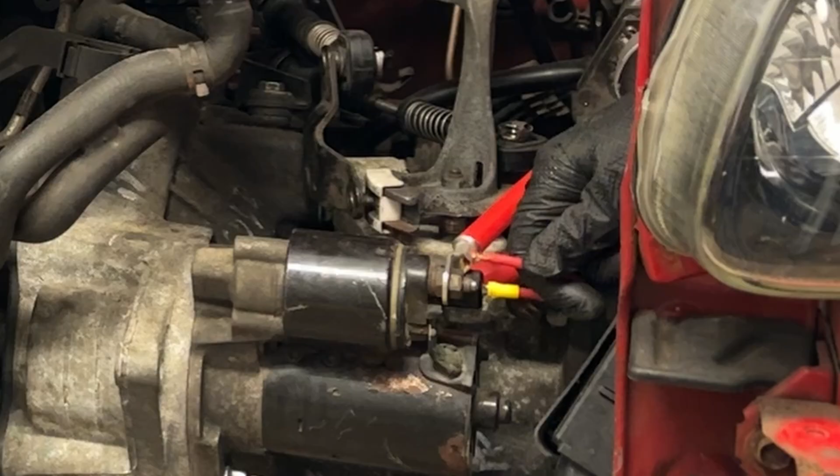Nothing happened. In the last part, I stripped out the rest of the interior and emptied out a load of stale fuel from the fuel tank. Then I left it there because the video got too long.

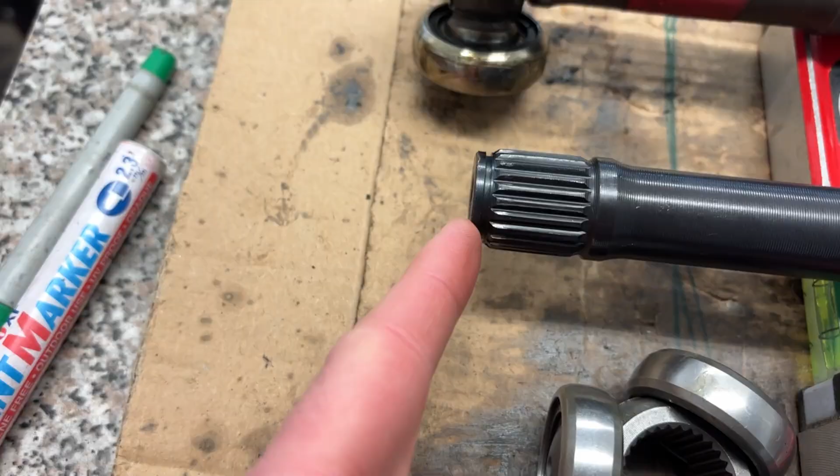I was going to cover the process of stripping down my shiny new drive shafts and prepping them to be welded up, but then I discovered my shaft wasn't long enough, so that put a lid on that for now. I can't use my original shaft because I'd already cut and welded it for fitment testing, so whilst I wait for another one to show up, I suppose it's time to open this can of worms.

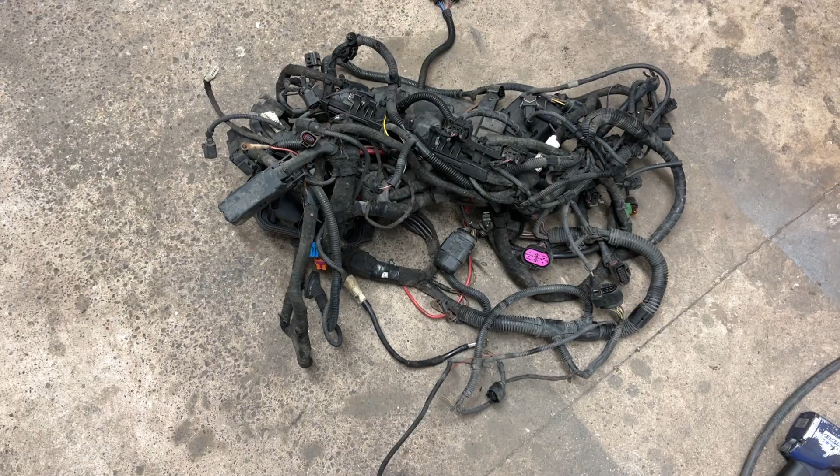Vehicle wiring is one of those parts in every build I follow where I just glaze over. Don't get me wrong, when done right it can be one of the more impressive and visually appealing parts of a build. It's just so intimidating to me, and there's a high and often expensive consequence for getting it wrong. But there's no use in me kicking the can down the road, so let's put the meter in continuity mode and get this over with.

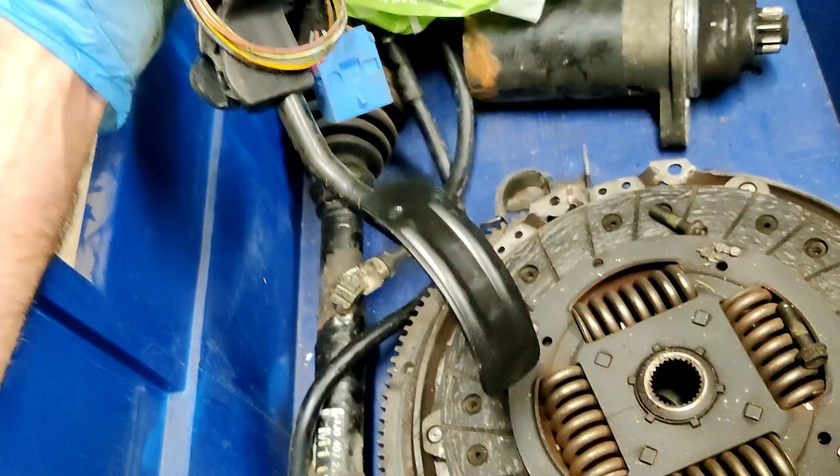One of the problems I've made for myself with the wiring, and with this project in general actually, is I bought everything on a pallet instead of buying a donor car and pulling everything I need from that. Because of this, every time I need a part I have to go to the breakers to find it. That means risking my life in health hazards like this. At least they left sanitizer this time.

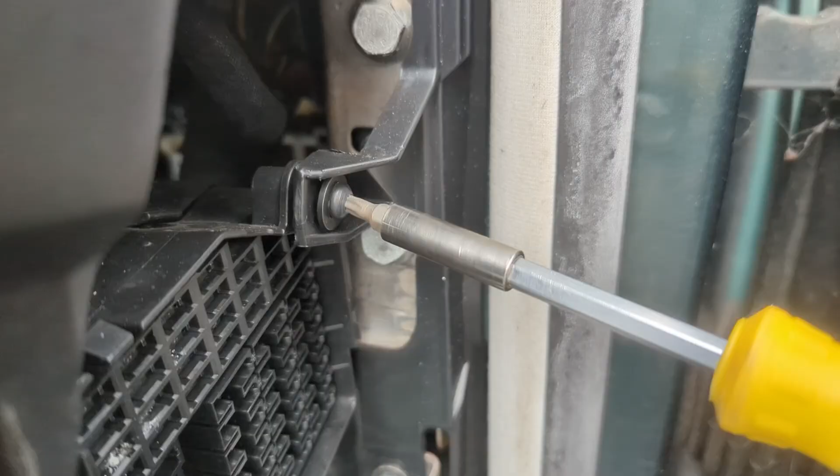After hacking out a completely empty fuse panel from this Mark IV Golf, I found another panel which still had all its fuses inside a Bora a bit further up the yard, which is just typical. I also took the clutch pedal switch because I'll need that too.

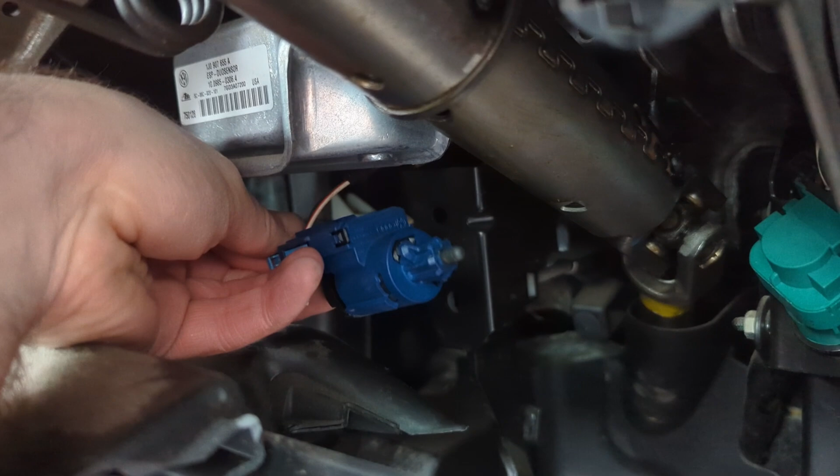My goal in this video is to at least get the engine cranking, but before I can do that, a few things need to be taken care of first. What's left of the broken dipstick pipe is replaced with this nice new one, which cost nearly 3 times more to ship than the part itself, thanks Autodoc.

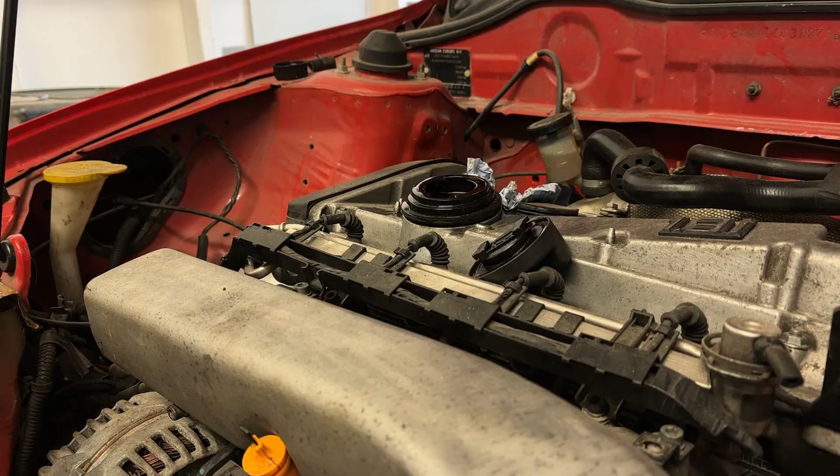Off camera I installed a new oil filter, and here I'm carefully filling up with some cheap sacrificial oil, just to keep everything lubricated whilst everything hopefully turns over. All I need now is a battery. I have a few kicking around, some in better condition than others. Luckily I have a way of telling them apart.

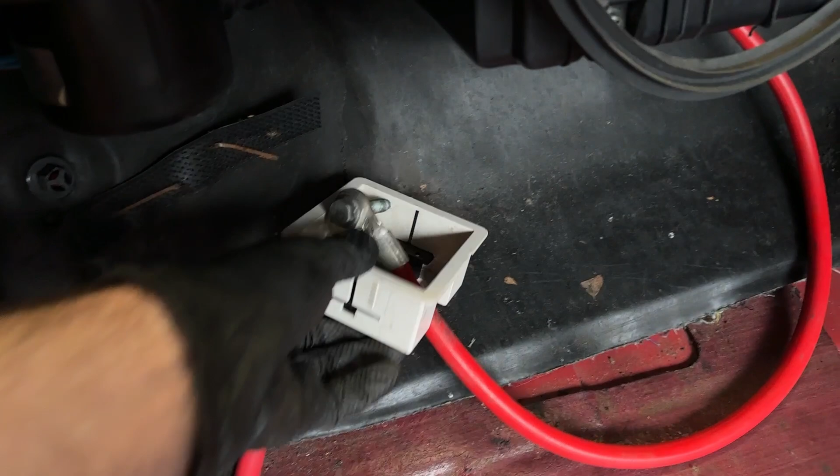We've now got a permanent live going all the way there. There's a fuse there. It goes all the way down the front of the car. We've got a temporary junction box here. It's just using a dry lining box for now, just to keep it isolated. This is then going through the bulkhead. There'll be a third wire that goes off in that direction.

And if we go through here, we've got it going to the starter motor. Ooh, so we're going to the starter motor. We've got a temporary ground wire that's going from the starter to the chassis. I know it's red, but that's just because that's all we have.

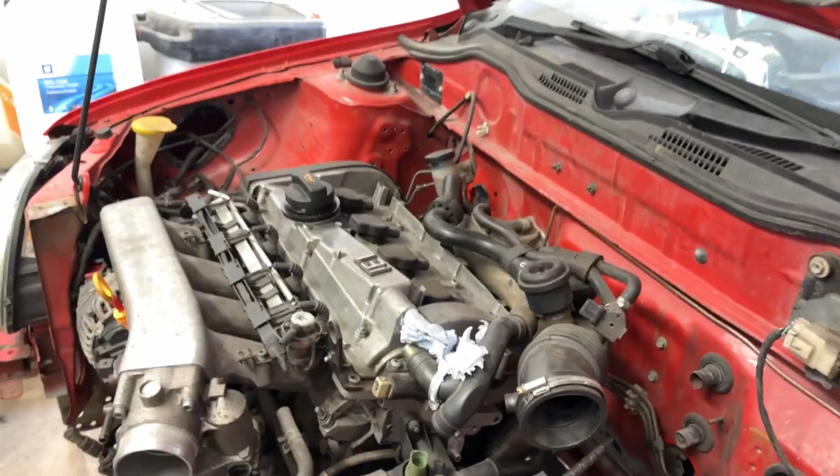And then just for testing, we've got a wire here that's going to the starter, which will just jump to crank it over. We've already filled it up with oil, and I've also just wedged a bit of wood back there just to stop anything from rocking when we try and start it. Also rotated the engine by hand, and there's no issues there, so I think we're ready to turn the key. It's not going to start because nothing else is connected, but we'll at least see if it turns over.

Right, I think we are good to go. Do you want me to do it? Yeah, it's going to be fine. What am I touching on? Just so yeah, if you just touch it on to...

Right, ready? Will, yeah. Nothing happened. Oh, I did. Okay. Nice.

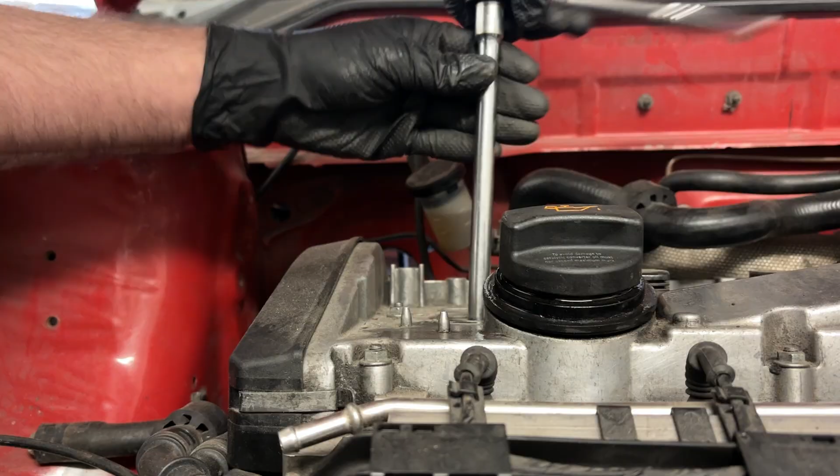I thought it'd be as good a time as any to run the engine through a compression test. Spark plugs are very oily, but the battery I used was starting to die, so I couldn't get good results. I ran another test later on with a bigger battery, and it seems okay.

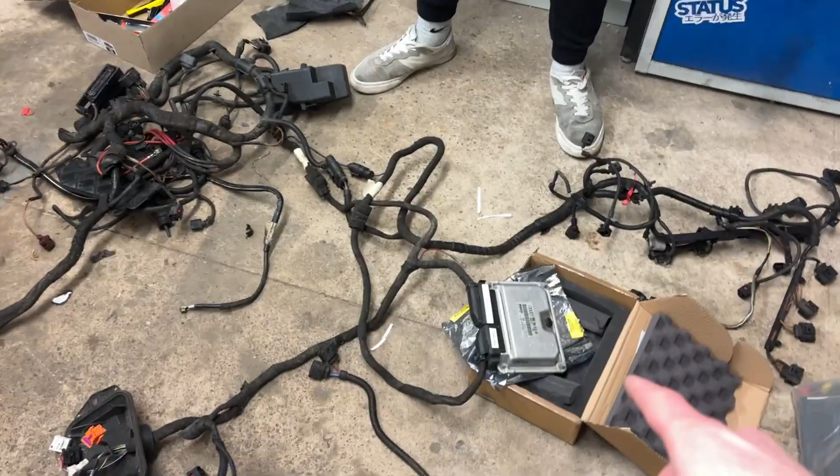Safe in the knowledge that the engine would at least turn over, I could turn my attention to the wiring harness. The ECU is connected to two main harnesses: one that connects to most of the engine components, and another that mostly goes into the cabin and connects to things like driver controls. It's not quite as simple as that, but you get the gist.

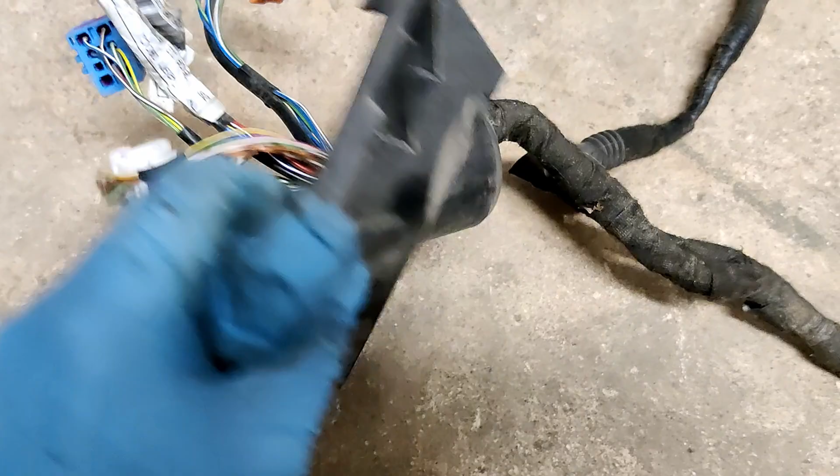This is one of the other problems with not having a donor car. Because I didn't remove the harness myself, I can't know for certain where everything should reconnect. A lot of VW connectors look very similar, and I found some will plug into more than one thing. Luckily, the VW community loves to write things down, so using some forum posts and technical documents found online, I can reverse engineer the harness and be sure I'm plugging into the correct components.

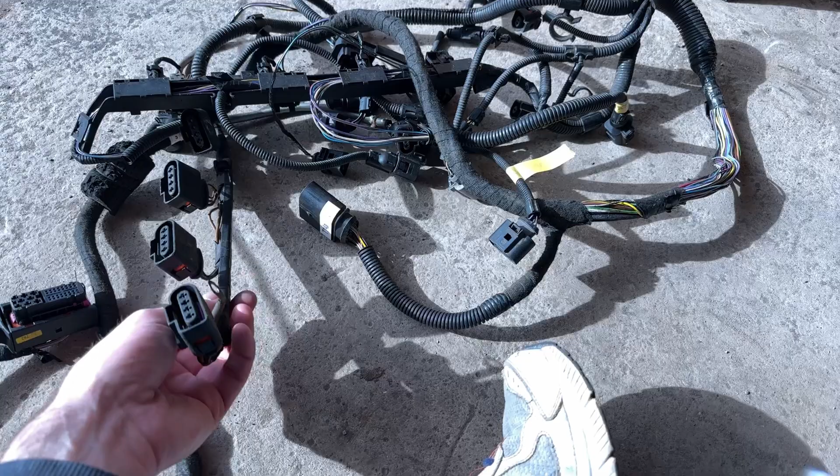So what we're looking at here is one half of the engine harness. This is the main part of the harness that goes to the injectors, the coil packs, and various other parts that live inside the engine bay. So what I'm going to do now is work out what each of these connectors is for.

Some of them are really obvious, like these ones, because there's 4 of them in a row. These clearly go to the coil packs, and these ones over here clearly go to the injectors. But then there are some ones like this that could go anywhere, and some of them are similar enough that they look like they plug into different things.

So my method of working out exactly what goes where is to follow these back to the main connector that goes into the ECU, which is this guy, and then using a reference and a multimeter, check that every wire goes back to the connector that I think it's going to, and then stick it in a spreadsheet. Then once I know which connector does what, I can stick a label on it, and then I know it's definitely going in the right place.

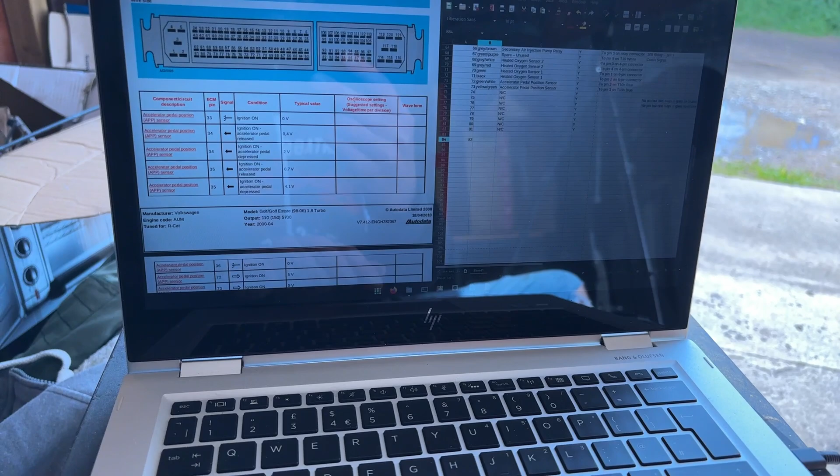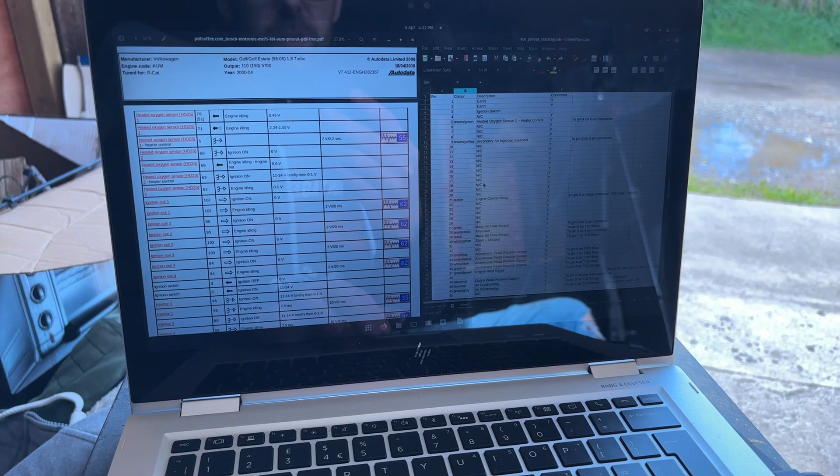So my method here is, I've got my laptop, here we are, and I've got a reference here. This is the pin out for the ECU connector, and then I've got a spreadsheet on this side, which I'm just using to write down where every pin goes. I know this information is already available online in various places, but because I'm always a bit wary that different cars might have slight variations, I just want to double check before I plug everything in.

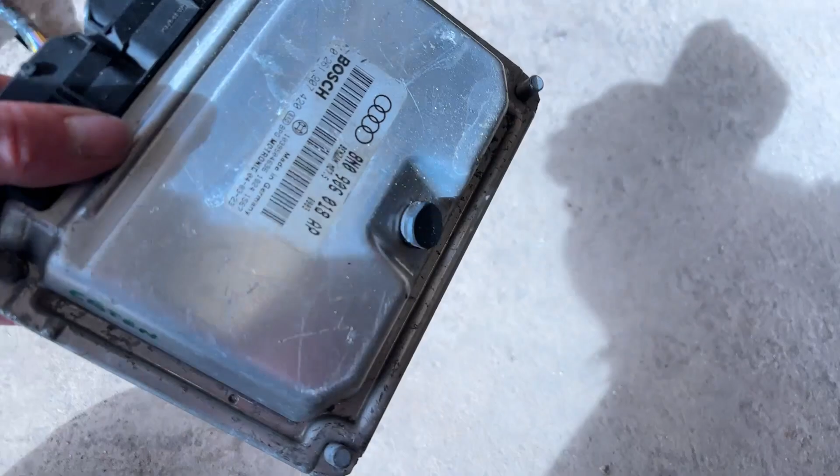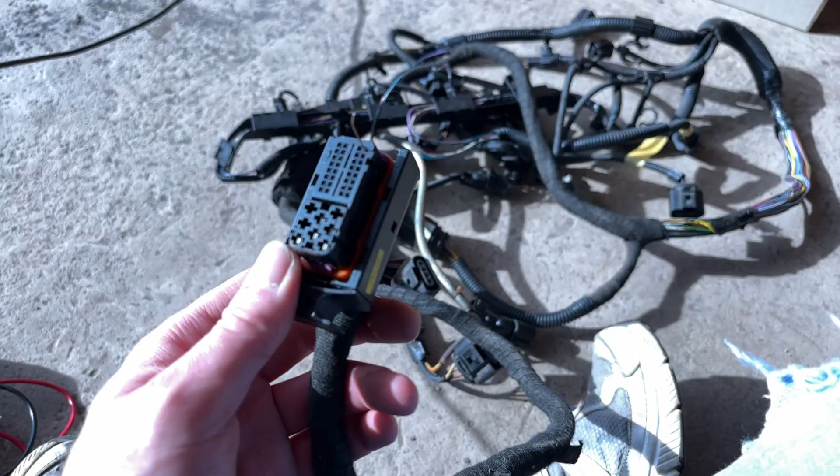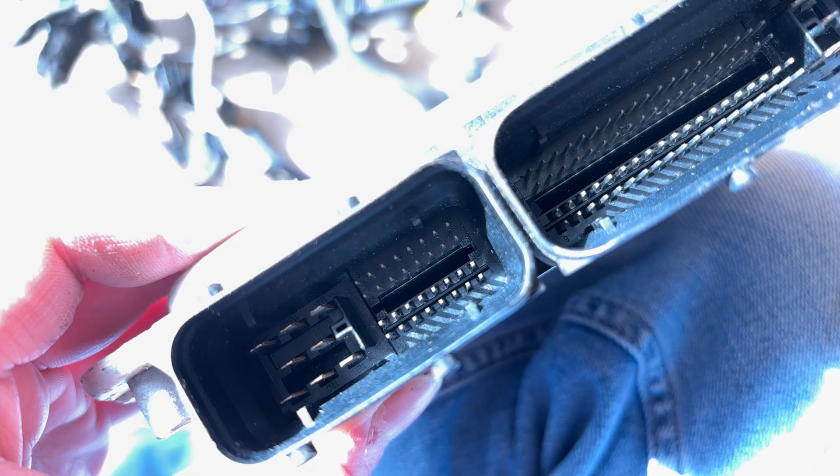So here's my method. I've got the ECU here, and this one I have to use as a bit of a reference, because even though the pins obviously terminate out here, these aren't actually labelled, so I don't know which pin is which. So I have to hold them up to the connector like this, and then work out which pin is which. I don't know if you can see in there, if you focus you can just about see numbers. So the numbers are on the ECU side, but they're not on the connector. So what I have to do is basically work backwards.

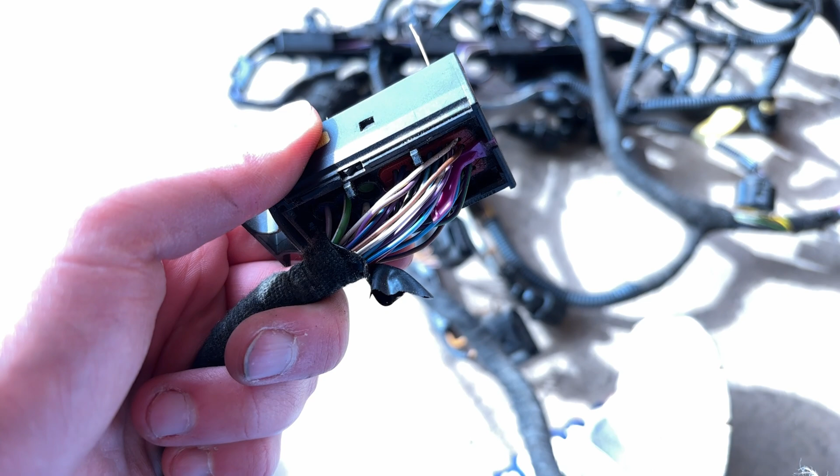I've got a little bit of welding wire sticking out of the connector, so I'm currently on pin 82, and the reason I've got this wire here is because I can't get my multimeter probe in there, so that's just in there to allow me to easily stick a probe on. And I've taken the protective cap off. So if we take pin 82, I've just confirmed it's a white wire. Follow it all the way down through this loom. I could unpick all of this loom, but I'm not going to yet.

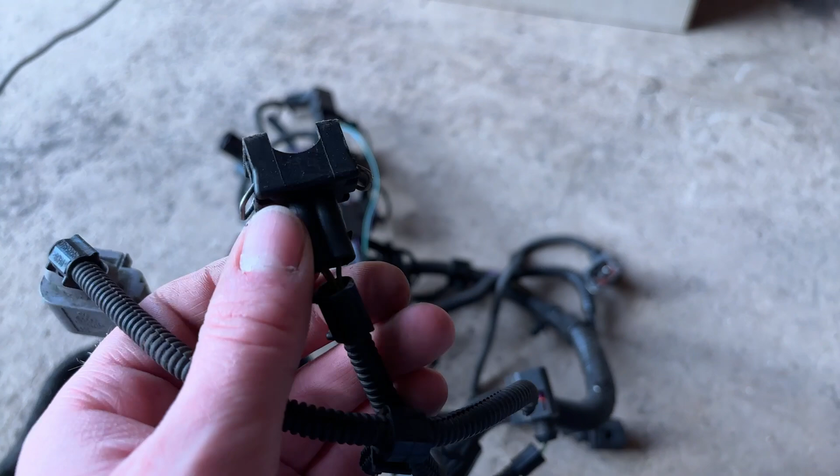It branches off towards the T14A connector. I can just inspect the wires going into this connector, and there are no solid white wires going in here, so I know it's not going to T14. So we continue along, and then it goes into this mess. Because I can't really see, unless I was to take all the loom conduit off, which probably would make my life a bit easier, I could just look through all of these connectors and check what the colours are that go into the backs of them. It just so happens that this grey connector, and you can see the white wire there, goes into pin 3 of this connector.

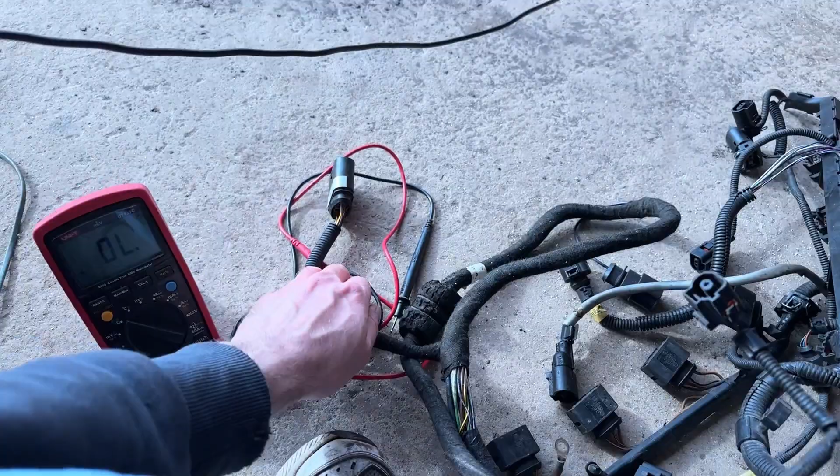And let's see if I can do this one-handed. If I take my multimeter, which is on continuity mode at the moment, jam that into there. This is a lot easier to do when I'm not filming it. So that's now in there. And then if I touch that,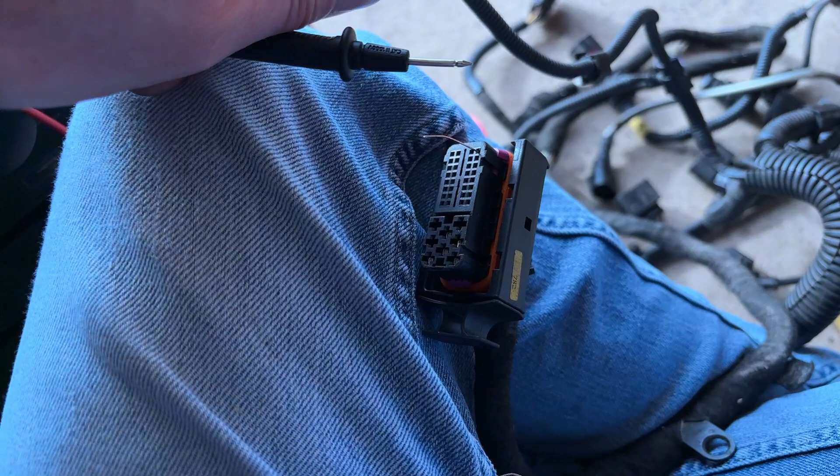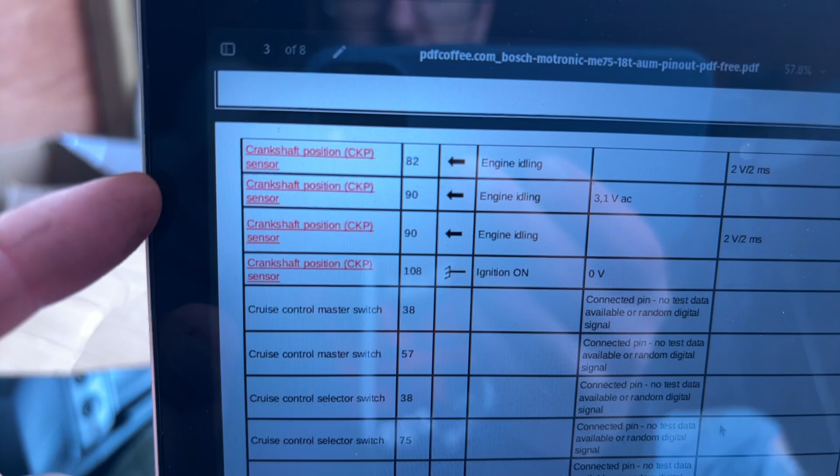so now I know that that pin on this connector is connected to this pin on this connector. I go back to my document, I look at where pin 82 is. Pin 82, crankshaft position sensor. So I know that pin 82 should go to the crankshaft position sensor.

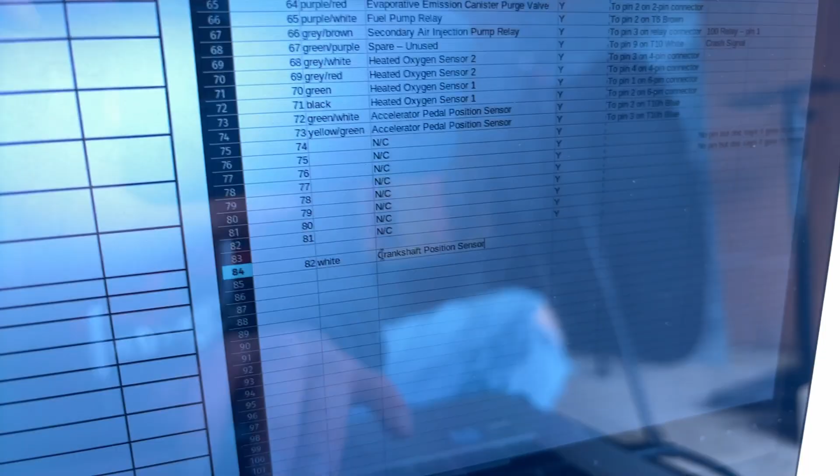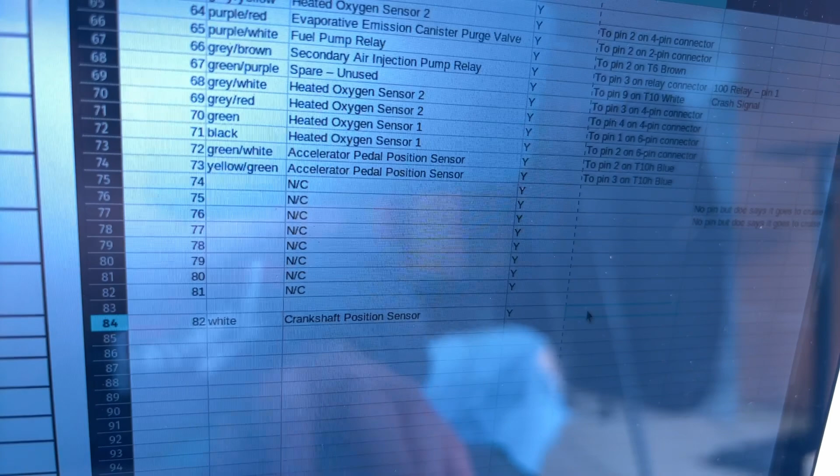So then what I do is, just in my spreadsheet here, I just write down the colour, which is white, and then we do crankshaft position sensor, and then I'm just putting a Y here to confirm that it has been continuity tested. And then just for my own reference, I know that it goes to pin 3 on the 3-pin connector, so I'm just going to put to pin 3, grey, doesn't have a W in it.

And then I just stick a bit of tape on there with a label, so I know that's crankshaft position sensor. I'm probably going to end up tracing more wires to the back of this connector, but that's okay. I do actually have a label maker for this sort of thing, but because of how many of these I'm going to do and they're all going to get pulled off, I'm going to save those for making fancy labels. So now I just got to do this whole thing for this entire loom.

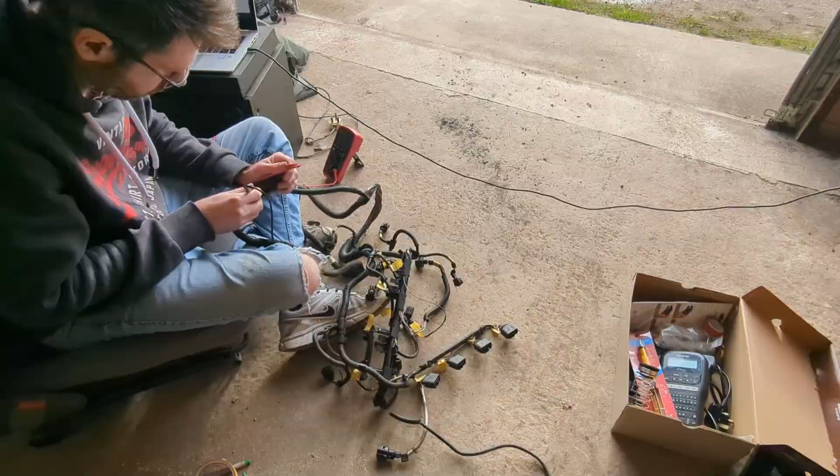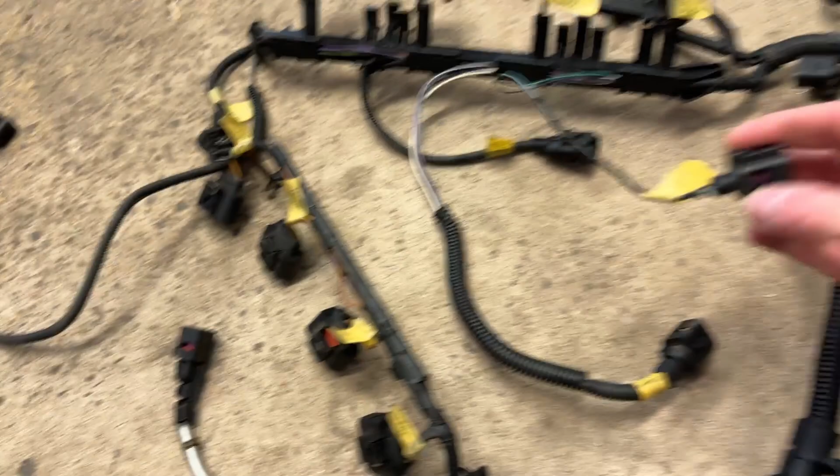So this is all of the harness in its entirety, both halves of it, and it's now been mostly labelled. So I've got most things labelled up, like this air temperature sensor, a couple of knock sensors. We already knew what these were, but I labelled them anyway for completeness.

Still a few question marks, like this one here. Appears to have some heat resistive sleeving over it, so it probably goes down the back of the engine. I have a feeling that's a speed sensor off the gearbox, but I'm not sure yet. But it doesn't go directly to the ECU, so I need to do a little bit more digging on that one. And there's this one here, which I haven't been able to figure out yet either.

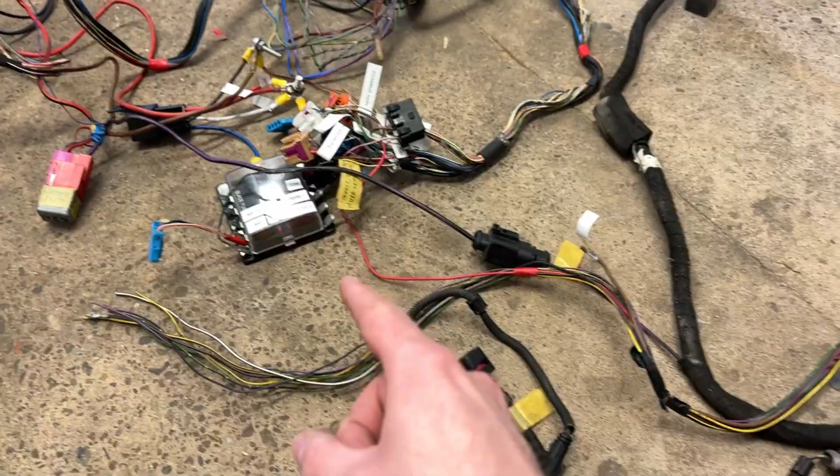Now, what I've been doing is I've been tracing every single ECU pin to a connector on the harness, but there are some of these connectors that don't connect directly to the ECU. Some of them appear to actually terminate here at T14A, and then they carry on along here to the other side of the loom, which goes towards the inside of the car, in the cabin. And most of these have already been cut, so I have a feeling some of them go here.

So I'm going to continue tracing where all of these come out here. I have a feeling one of these is like a speed sensor or something, because so far I haven't managed to find one that plugs into that, and I'm not sure how the ECU would normally get its speed signal to then pass to the clocks. I'm hoping it doesn't use ABS to do that, because there's no ABS on this car.

So what I'm going to do is I'm just going to take the connector, and I can see there's 3 cables coming out of it. We've got a yellow-black, so that's like a pretty thick wire, and then we've got a purple-white and a solid brown. I think that it connects to T14A, and I can already see some of the wire colours that are in here, so I think we should probably just confirm that first.

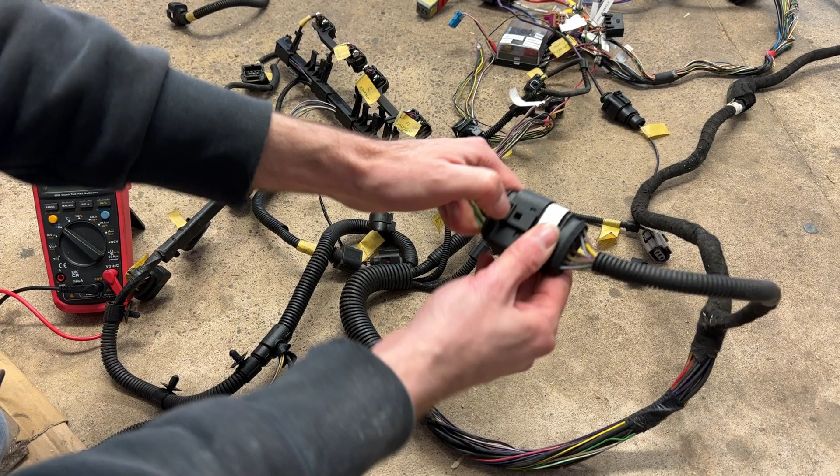How do I get these connectors, man? Is this just a VW thing? Because I've never known it to be this much of a problem. Now, my understanding is that, well, the only way I managed to get these off is if you get a flat head and you just do that. Is that the right way?

Well, it worked. Actually, do these wire colours correspond? No, they don't. Now, what's interesting is that there are pins that go into T14A that don't come out the other side. So, for example, pin number 14, which is this like a purple, like pink grey cable. There's a pin in there. Can you see that?

No, you can't, it's not light enough. Anyway, there's a cable going into the back of there, pin 14. Pin 14 on the other side is vacant. So that's a bit weird.

I'm just having a quick look to see if everything goes in. Now, pin 12 is that purple, pinky-white colour that goes into pin 12. That actually connects to this here, so I have a feeling that's the cable. On the other side of the connector, it comes out yellow-black or yellow-brown, can't tell from this light.

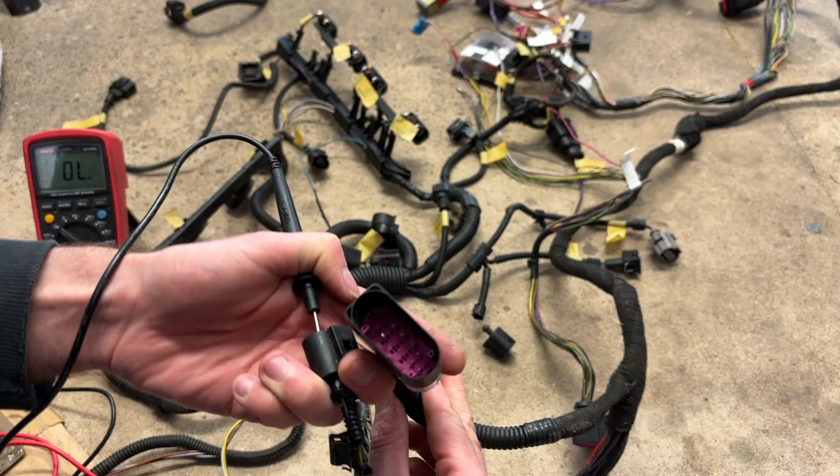So first of all we'll just verify that pin number... so pin number 3 on this connector here, if I stick a multimeter in there, which I can't because it's too small, I guess we then just need to check that it corresponds with the right colour on this connector. One side of the probe to pin 3 on this connector, and I'll try and keep it in, and then I will connect the other side, the other probe, to pin number 12 on this connector. Try and do this with two hands.

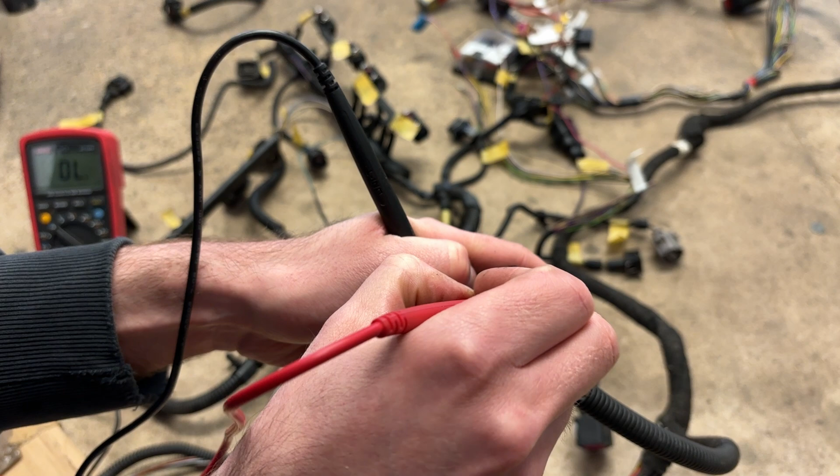Okay, so that is going into pin number 12. So pin number 12 on T14A goes into pin number 3 on this connector.

So now what I need to do is work out where pin number 12 on this connector, where's the other side of the T14? Ah, there it is. So then we need to work out where pin number 12 comes out, which is this wire here. That's pin number 12, so it changes colour through the connector.

And then I've got to trace it through this stack. And it's there, it's been cut. So let's just check that we have continuity all the way through. We should do. There we go.

Cool, so now I need to work out what this wire is. I didn't cut this, by the way, it was already cut. So I imagine it probably went to this bunch of stuff over there. So I'm just going to do a little bit of fact finding.

Right, so what I've done is I've downloaded this guide. This is actually a forum post, but I've downloaded it as a PDF because the internet up here is really bad, so I've always got a copy locally, and it's got all of the connectors that go into the cabin. So you've got the brown connector, the orange one, the white one, but it also has, the early cars had what's called a T10, later cars had what's called a T14. The 14, I believe, is the number of pins on the connector.

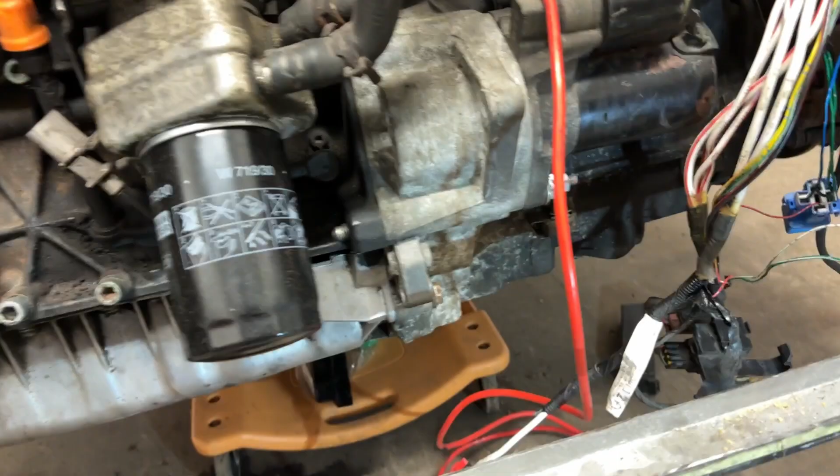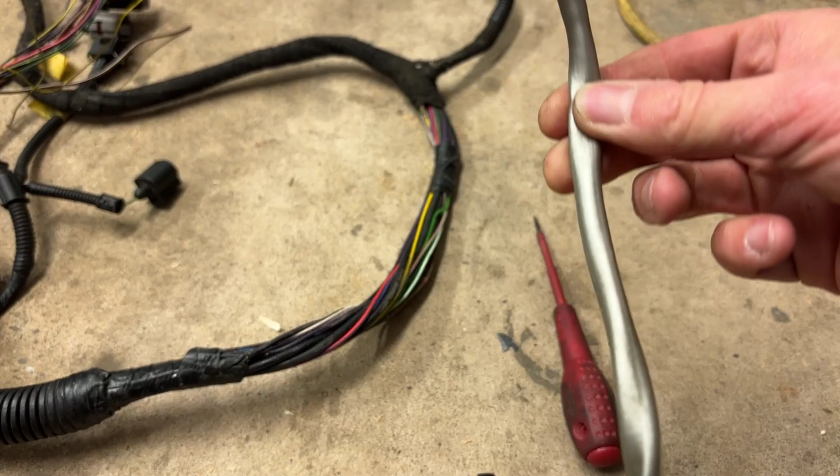And just to show you what I'm talking about, I'm talking about that thing. So this guy is sending the oil level and the temperature. So that's what that connector plugs into, which does make sense because it's got this stuff on it, which means it must go down the back of the engine where the hot side is, and it's really oily and greasy where it's close down to the road. So that makes sense, so I'm pretty certain that's the oil level plug.

So I'm going to put a label on that one. And then just for completeness, I'm just going to add to my spreadsheet here pin number 12, and we've continuity checked that one, and it goes to, there we are. Right, so let's stick a label on it.

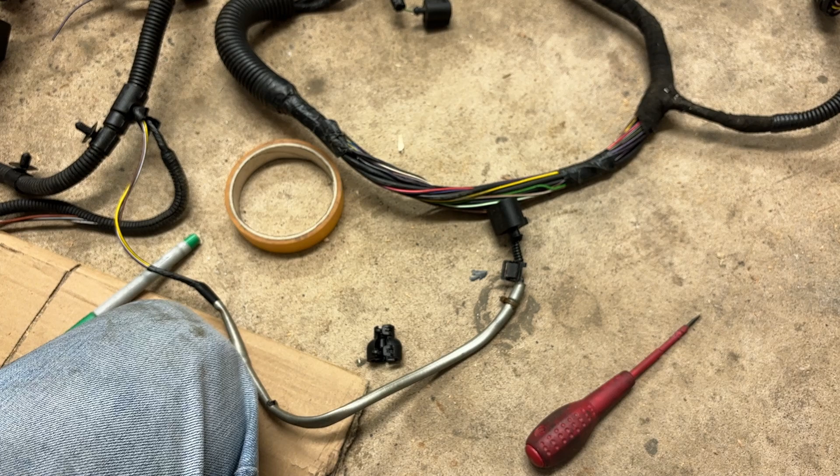Okay, everything is all labelled up and ready to go on the car, and I also have most of the things I need in the spreadsheet. I'm also going back through the individual connectors and tracing them back to where they're supposed to go, because not every connector on the ECU goes to every pin on the connector. Some connector pins go to other things like power and ground and things.

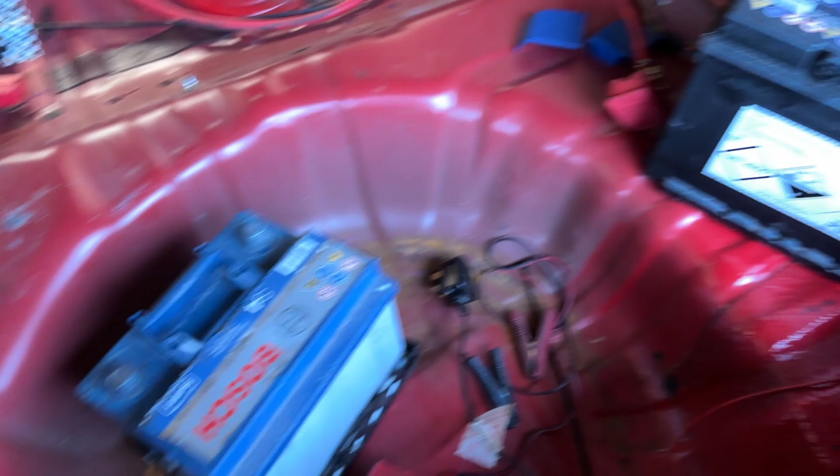So just a quick update on what's going on in here. I think in a previous update I had these all connected up. I've since put a bigger battery in because this one down here just didn't have enough oomph to get it going, so we got this bigger one which definitely does. Got a fuse in there.

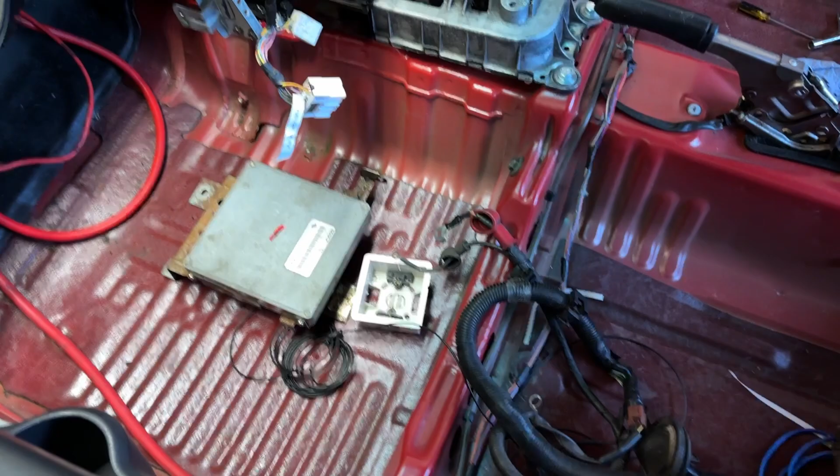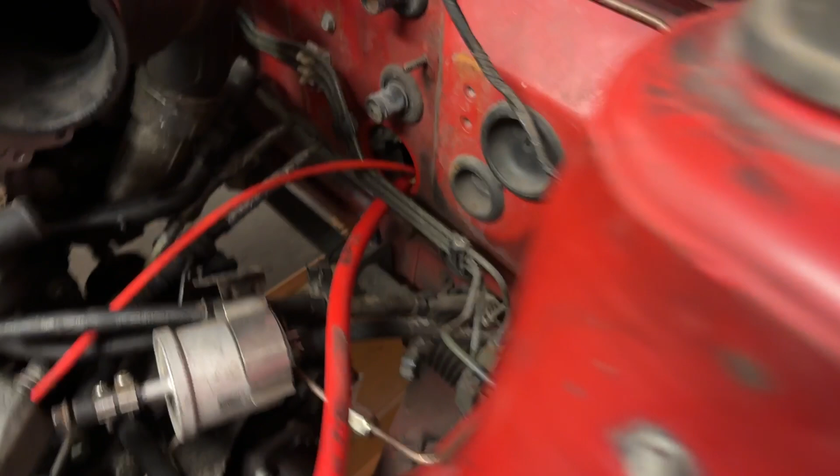I've replaced this socket box down here with a proper distribution panel, so that's now all isolated. At the moment we've got the main feed coming in on the left, the starter motor connected to the one in the middle. On the right, that's connected through, that's that small one, that also comes through this same hole. And so you've got the thick one that goes to the starter motor down there. We've also replaced that big red cable with a correct black cable, which I managed to find.

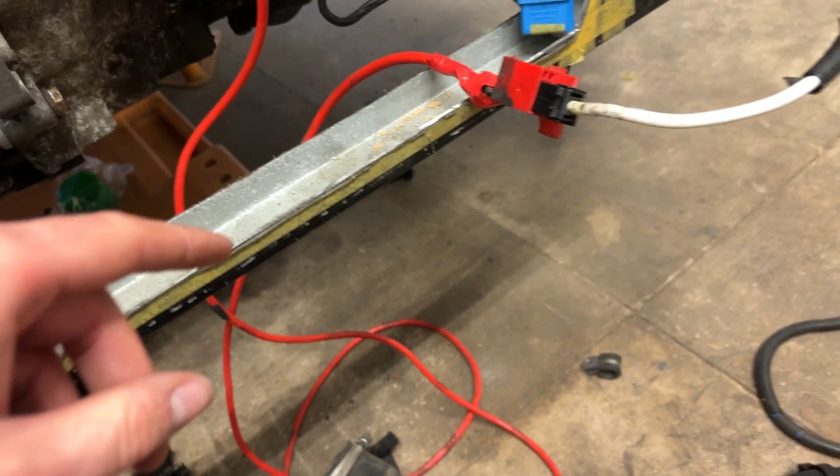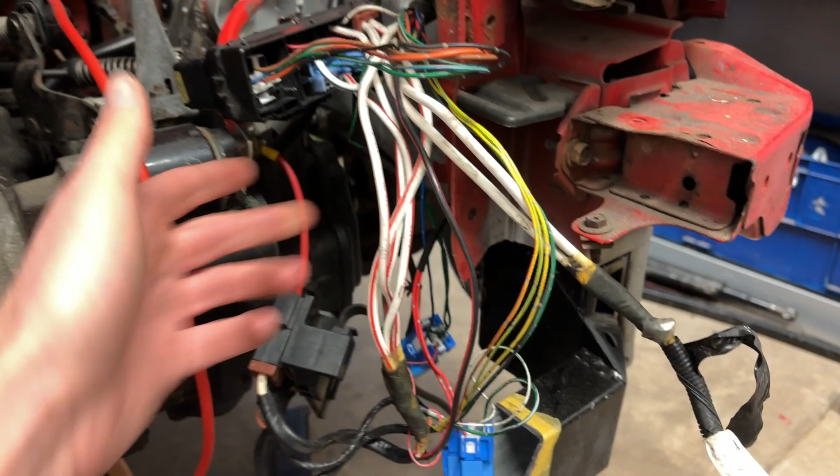We've got just this long cable for now because I can't cut it down. This is connected to what on the Micra was the main battery input to the fuse box on the car, so this is basically powering the Micra's fuse box. It's coming up through here, through this mess, most of which will be able to go, and then back in through the wing, and then it comes in through down there, all along there, and then towards the fuse box. It's just hanging out down there.

So we'll be able to pull most of that inside of here and just run ignition from down there and power straight down to there. So this long cable, this thin cable, will be able to just go directly over to there, which will save some cabling.

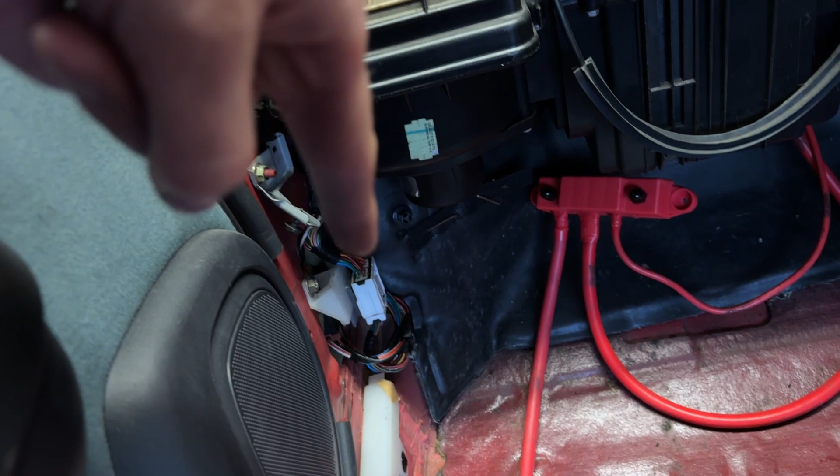So let's just connect power and ground. Pop these on, ground on. This little light comes on, and then actually I'll just double check that there's nothing in the way.

Oh, also need to mention this. So I've got the exciter wire that's going into there. That's actually just coming off the existing wire that used to come out of there, so that's just temporary for now. Eventually the VW loom will do that job, but this is just for testing.

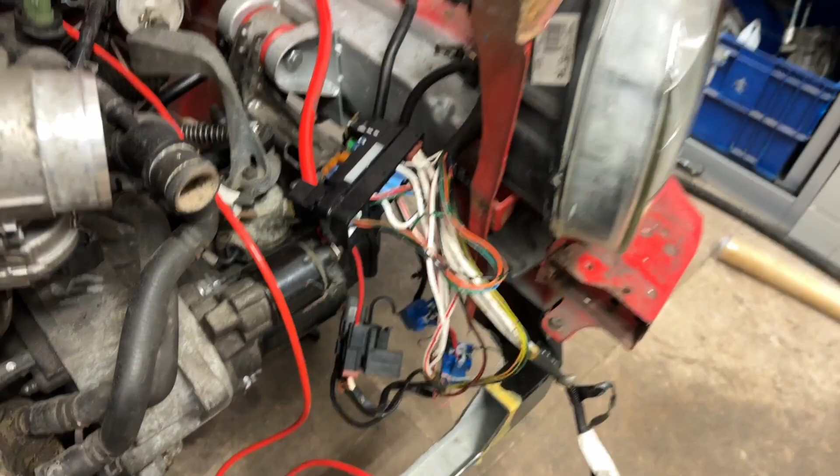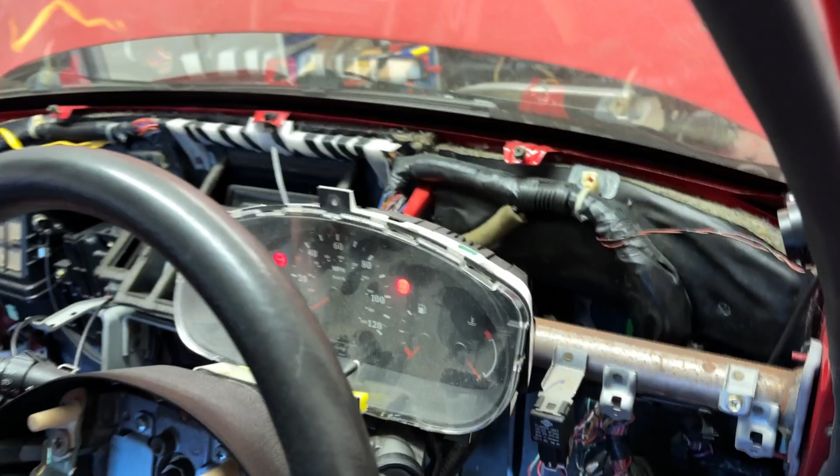So now if we come over here, we've got lights on there. If I turn... then we've got the lights on the dash. I don't know if you can see over there, let me just adjust the exposure. Can you see? Yeah, so that's the main lights coming on.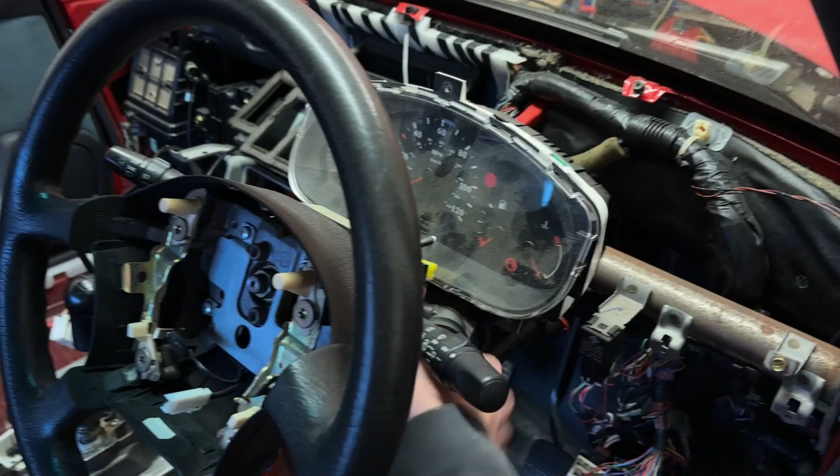Indicators. That's good. There's no horn. Fuel light - well, that makes sense because there's no fuel in it. If I turn the key... nice. The starter motor is not disengaging properly, I don't know why that is.

But we're making progress. This bunch of cables down here is the original Micra's engine loom. Completely unnecessary now. We did have it connected through because there were some bits and pieces that I needed, but those have all been completely eliminated now.

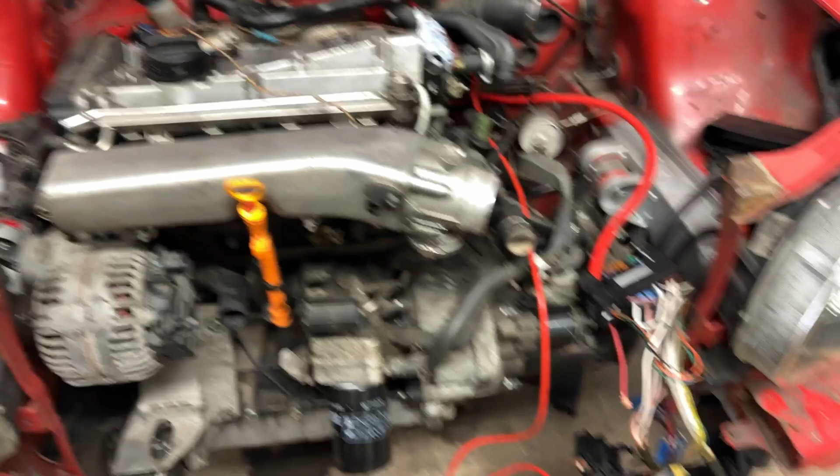So I think now what we need to do after that is tidy this mess up, and then we need to attach the engine harness, which hopefully will be a lot easier now I know where everything plugs in. Get a fuel line, two fuel lines from here and over there, over to there. Check that we've got spark, put some fuel in it, and we should be able to get it running.

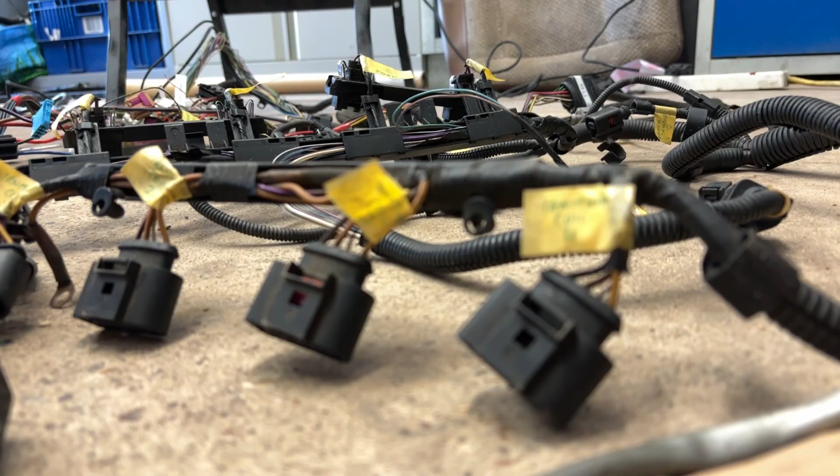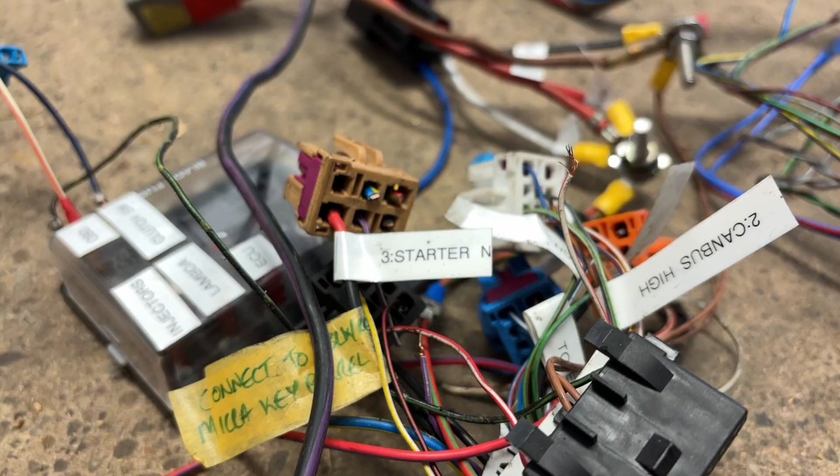With all that work done, I came out of this with a much better understanding of how everything talks to each other. Now, instead of scanning through different documents and posts, I can just look up the mega sheet and trace every wire from beginning to end. It also makes removing parts of the harness I won't be needing a lot easier with less chance of error. Now all I need to do is connect everything up and see if the ECU survives.